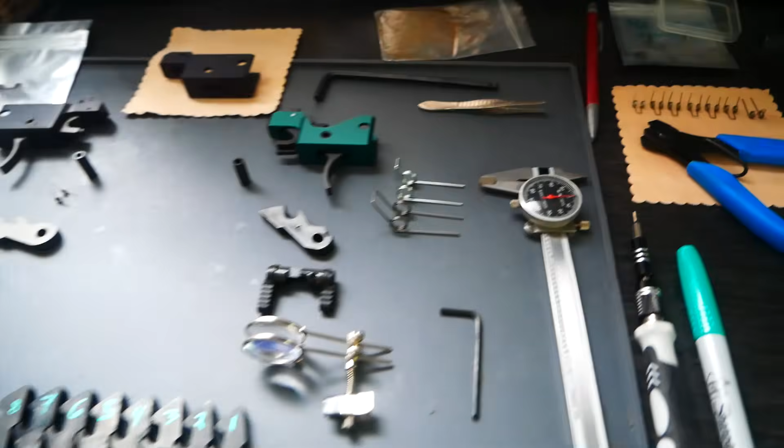I'm going to bring you over to my desk and show you some of the things that I've been working on. Okay, so welcome to my desk. Basically what I'm going to do here is just show off some of the parts I've been working on.

The very first thing that we're going to be releasing would be this. How do I want to do this? As you can see, several different design iterations. These are all just small micro improvements to improve functionality, in some cases just working out design and making things work.

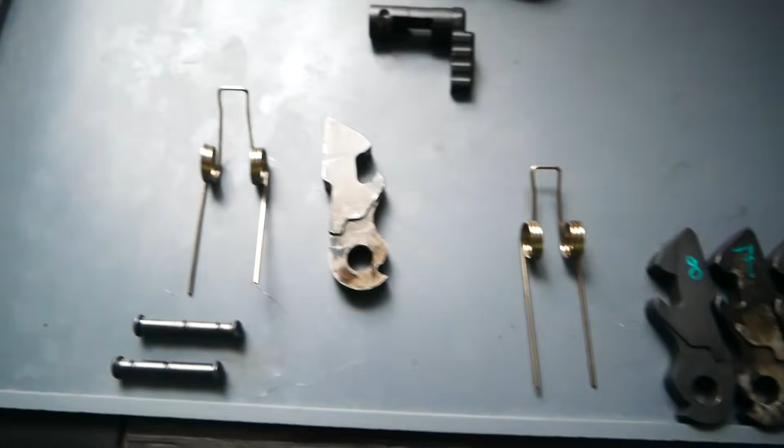The new hammer spring that will be coming along with this new hammer, which I will explain here in a minute, as just the hammers, the first item is going to be coming out. These are all just, they were heat treated and dropped in the oil.

They have not been tempered or had any kind of other post-processing. They basically came out of the oil after hot heat treat and then were dunked like that. So they will not look like this. We will be using a hot bluing that is mil rated for corrosion and everything. New upgraded process for these that'll be super exciting.

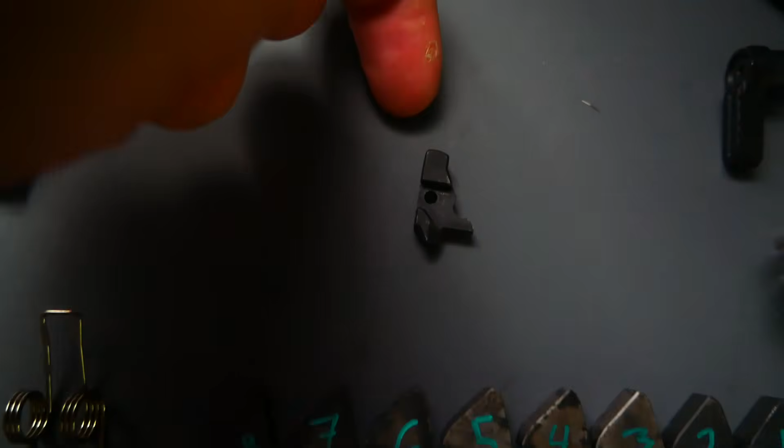Okay, and then soon after that I will also be releasing my version of the locking bar. The big improvement here is the same thing I had on my very first Gen 1 rare breed, and that is the easy close feature up on top.

Instead of the current ones that have this kind of hook shape up here that you have to step your BCG over, which, because if you're ever in a high stress scenario and you get a jam or something, your gun's all jammed up and you got to pop it open and pull a stuck case out and then put it back together, that extra step of having to pull your charging handle is no bueno in my opinion.

And so this, I think, should be a standard on everything and is a huge improvement, just having that easy close profile at the top that I figured out long ago when I first developed the torsion lock bar style locking bar.

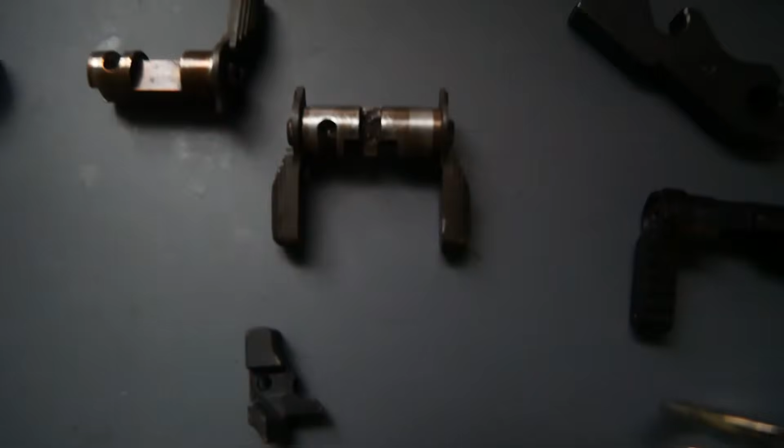I really liked the 2 position where it throws that FRT first, and I was like, I want to keep this in there, and so I developed what I was calling the Light Fighters Quick Action Safety Cam, which is this. It switches everything to be like a safe, FRT, then singles, quick action, right? I want that FRT up front where it makes sense, and then when I have time to take that long, slow, precision shot, I've got time to flick my safety over that 1 extra notch to the singles. So I've had a ton of positive feedback on the 200 triggers I released with this feature here.

Everybody loves this safety, and so I will be doing safeties. And part of what I'm doing here is some of the parts are just going to be actual upgrade improvements. And I'm actually going to talk more about this hammer here in a second because I've upgraded multiple things on this. It's not just a hammer spring, which I will talk about too, but I will show that and talk about it here in a minute.

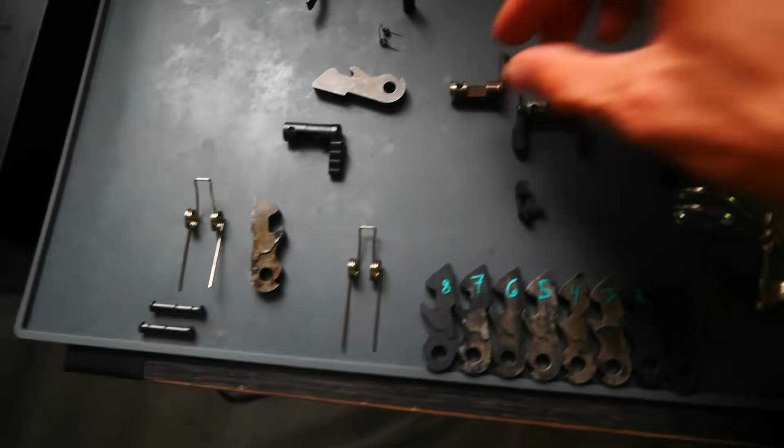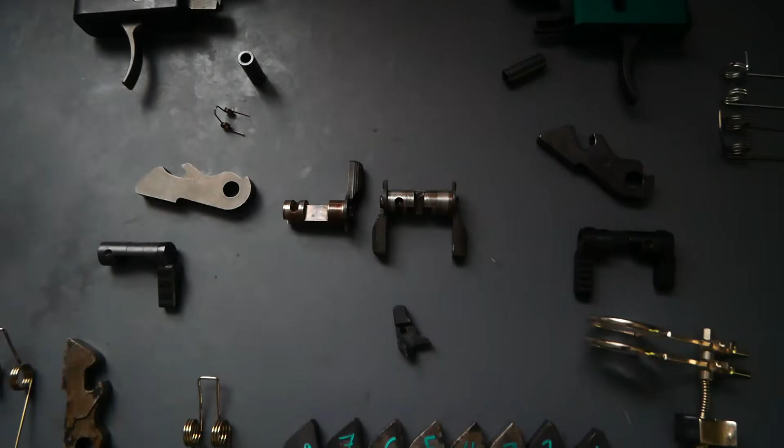But yeah, like with the safety, we're also gonna be doing design customability for your FRT. So when it comes to the safeties, we're gonna do everything safety wise. You're gonna have the classic one in safe in 0, 90, 180. I'm also gonna do the classic in 0, 45, 90. And then I'm also going to do the new Light Fighters developed by Militia State Armory in safe in a 0, 90, 180 and in a 0, 45, 90 version.

So you'll have options there. And we're gonna go even further and give you 2 different options as well. You can have it in a steel cam or I'm also going to do it in an aluminum cam, so you can have lightweight or durability depending on your mission set and what you need. And so both those will be available. And then going into some of the customization things, everyone's going to be doing a classic. I know you all love the classic.

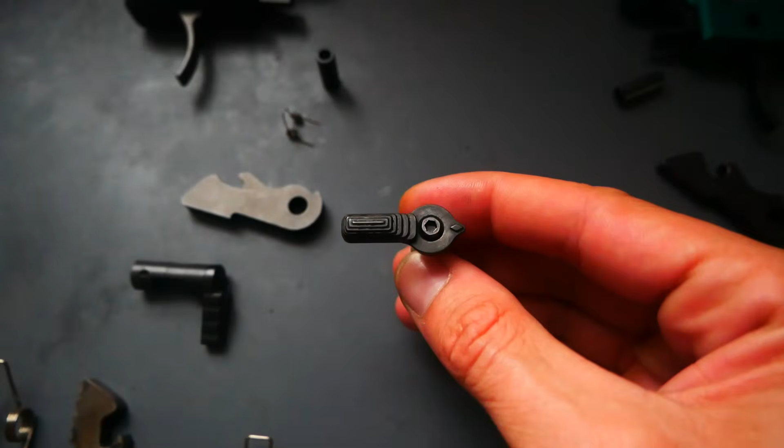I'm probably going to do a classic too, just on principle. I will have my Light Fighters Advanced Classic, inspired from a classic trigger. It looks like a classic. The only difference is I've cut this front at a 45, because on other safety levers, when you throw to that 90 position, you get jammed up on this corner. This one is cut so your finger doesn't run into a wall and get jammed, but floats up over that corner and digs in, giving you that last little push.

My hands look really red right here on camera. They're actually usually really white. Okay, side note, but yeah.

This is why I call it the Advanced Classic, because it is the classic design, just made better. I'm probably thinking I'll do this in reverse, so instead of having a convex, it'll have a concave inner swooping, giving you more of a flat blade, and then do a different, stylized design. Nothing like this - I think these are overdone, where you just have kind of a basic lever, not a whole lot to it, pretty basic. We'll do some styling, try to make them look a little more quality and firearms-fitting, not like a toy, but like a gun designer created it.

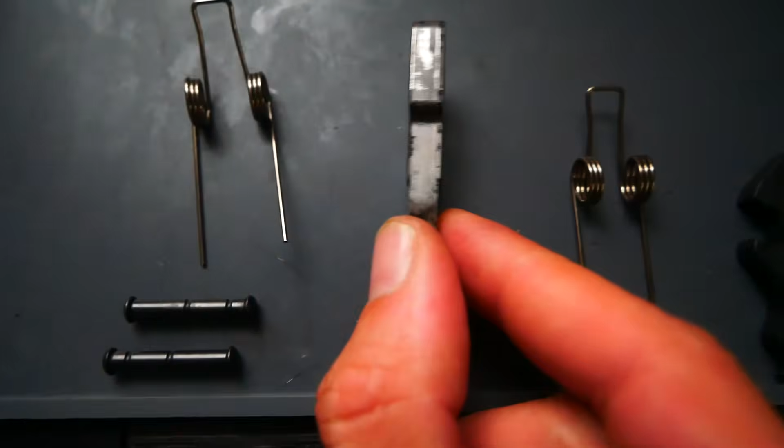This is why we have these cutouts on the side here. It's a little bit thinner, just at this bottom profile - I'm not going to give you numbers, but it's not very much. It's just enough, so calculated, that we can use a heavier wire spring and put more coils in there. It's got one extra coil from the standard - this has 4 coils, that one's actually got 3. You can count from the other side and see the 4, one to one, it's exactly 4 coils. And if you look at the preload on it, look at that preload.

Because we have an extra coil in there, you get multiple things. When it moves through its arc, when the hammer's cocked back, the more coils you have, the less each coil has to move, right? And so you're going to get longer life. But then you have the thicker wire and more preload, so you're going to get a stronger, heavier, more consistent, reliable strike with your hammer on your primers. And yeah, something - I got one more point there, I can't think of it at the moment. But yeah, you're getting more stuff.

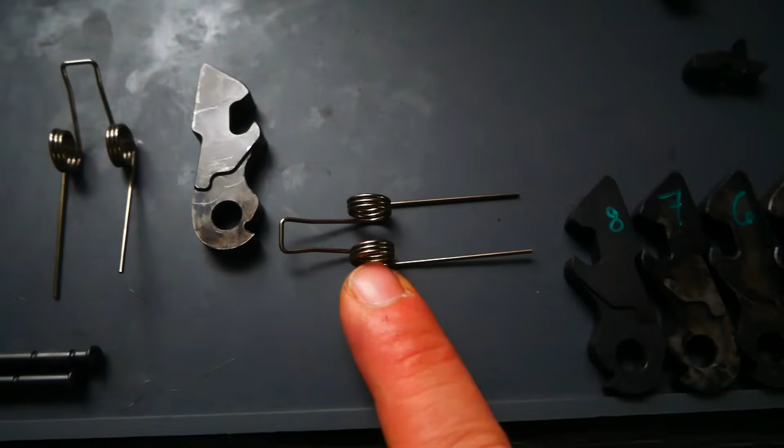Which then I'm actually going to be producing this, because we're doing all the customization parts. We're going to do 2 versions of this. So this is an 038 wire.

This is an 036. The 038 wire with one extra coil fills to max. Mil-spec hammer spring is an 045 wire. I have an 047 wire coming in, and it'll have the same number of coils as this. I'm going to give it that preload, but what it's going to do is give you a hammer spring that's very stiff and will set off your primers no matter what.

When you just absolutely need a hammer that can drive it home, then that one will be the one available. This one will probably be the more popular option, as it gives more preload, more power, more life expectancy, more of everything over the lesser coil design, but is still better, still has higher things, whatever.

Alright, so boom boom, I'll put out a video on that. We can talk more about the hammer spring. I've probably covered a lot of stuff. There's a lot of things I haven't covered, but at this point I'm just going to be echoing myself because I don't remember which parts I've covered and not covered.

Okay, so that gets us into other features of the hammer. That talks about the cutout here. Another big gripe I've had with hammers is everyone has this really pointy square tip right here. And when you look at the face, this drags - that little nose, there's a tiny spot right there that drags along your BCG while you're shooting.

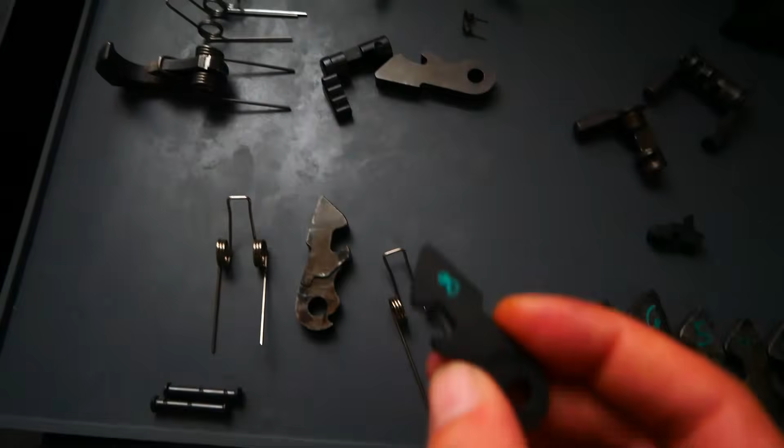Dragging is not good, right? You don't want parts dragging on each other. So this one has been redesigned. Let's see if I can get it on camera here. That nose has been tipped back. I've had to do several designs to get this feature right. Oh, you'll have to go look at it in the ads. I'm sorry, guys. Actually, I'll show it to you on Fusion here in a second.

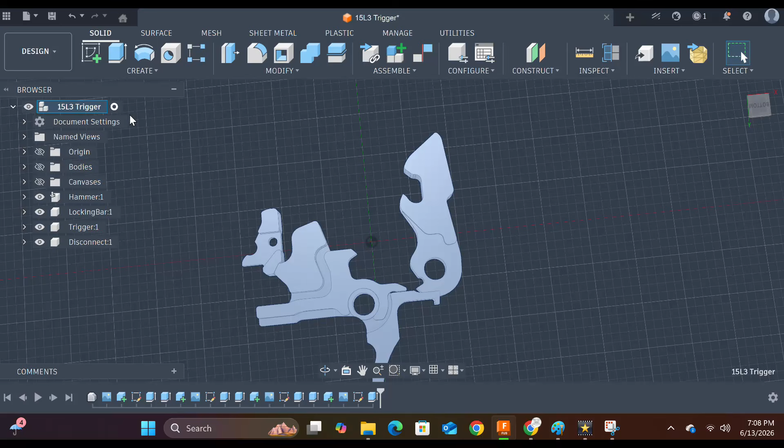This nose has been tipped back so that instead of riding on a small point, when the hammer's first cocking, the BCG hits about here, walks across the face, and then right at the very peak, when you're at full BCG, this last little bit is where it just drags, and you have a small flat about this long because the bottom of your BCG angles down and then flattens out. On that flattened out spot is where this spot just drags.

Well, here with that little round, as soon as it cocks back and reaches that position, this actually walks - it rolls, kind of walks along the bottom side of the BCG in that spot. And so you cannot pull the trigger too hard where it's going to preload, because as you pull the trigger hard, it walks. That top little bit walks and gives the BCG forward momentum, and it slams home.

So this is a huge, huge improvement. I've talked to tons of people about this. This has been my biggest gripe with a lot of FRTs, because uppers and lowers aren't the same, right? Some of them are a little tighter tolerances. And when you get ones like that, this can drag and put a lot of preload and actually make your bolt go boom boom boom boom, shook shook shook. As you start pulling into it, you can slow that bolt down.

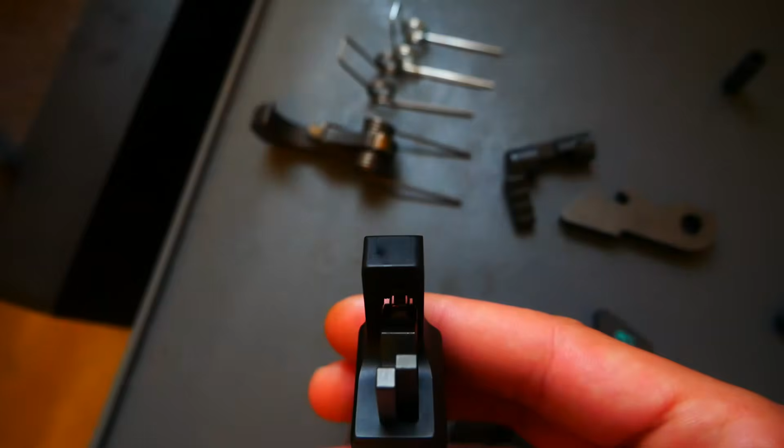Come on, focus. But mine just, it looks like it fits it. It's squared up, it matches. It's just better done, it's got a little bit heavier wire to it.

I don't know if I can get this right on camera, get this the right way. But it's just better done. The edges are more trimmed in where they're supposed to be. It fits the profiling better. It doesn't squish out into the edges, and it's just balanced better for the locking bar.

It's small improvements, but when you're talking long-term reliability, it's the micro things like that that really do end up making the difference. So there will be huge improvements done to this, and I will be making the locking bar for the Partisan as well.

If you've seen the Partisan locking bar, it's kind of like my original Rare Breed, although they went a little less spring, a little more material. Once you actually pull it out, there's a lot of just bulk material on the locking bar, and it's kind of an underwhelming spring as well.

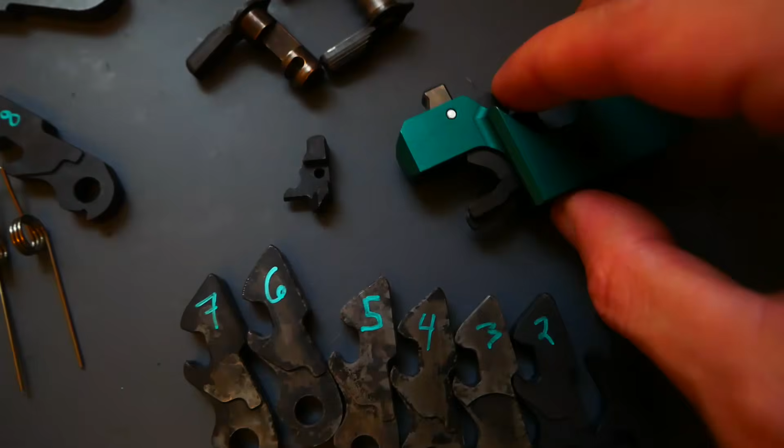So I'm going to be bringing this style, the dual torsion, to the Partisan. And with this, there's actually probably going to be 2 options, because there's not really any good options here for this, so it's going to be user preference.

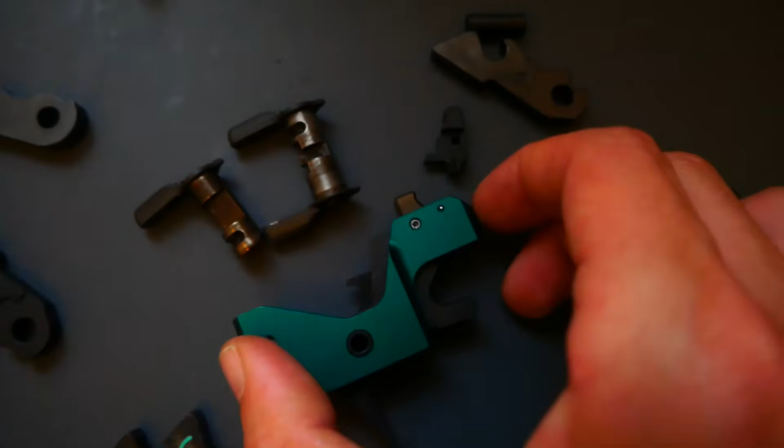Option 1, the slightly more expensive option, is I will have a drill and a pin that comes with the kit, so that you can chase this hole to the other side, put a pin in there, and use the full classic one.

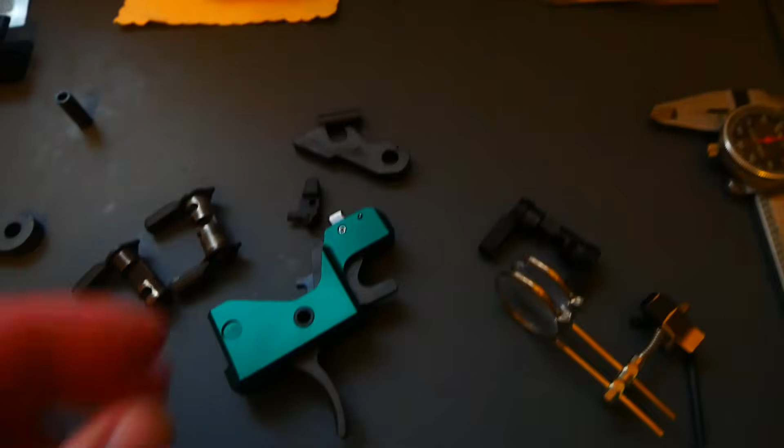The other version will be where the spring just— sorry, battery died. Oh, battery died, and now I can't remember what I was just saying. I had to go run off and get a new battery for the camera and everything. But yeah, we'll be upgrading the locking bar.

Oh yeah, and then the second one is going to have a spring that comes up and just rests on top. It's not the best option, but that's why it'll be the lesser expensive of the two, and the more expensive will come with a pin and drill so that you can chase it.

I'm nervous about it because I don't know everyone's ability to chase that, and I feel like that's the one I want to do, but in case some people don't have the tools and ability but want an upgraded spring, it's kind of the option I have at the moment as far as I've thought and put into it, because I've been working on a lot of the other stuff as well.

Final thoughts: the hammers are coming out first, and then I'll probably be doing some of the safety levers. A big issue with the safety cams at the moment is actually material. I need 3/8 material, but I need 3/8 undersize, and for whatever reason I cannot find a good material supplier that can get me 3/8 undersize.

I got someone local that I'm supposed to be calling this next week as soon as it turns Monday, and I'm gonna be asking them on that because I need something like .372, .373, but it always comes in at 375.5 or all the way up to 377— sorry, that extra 7 threw me off for a second. But yeah, it goes all the way from like 375.5 to 377. And like I said, I need it undersized, and it just seems to be a weird one that I don't know where everyone gets their stuff from.

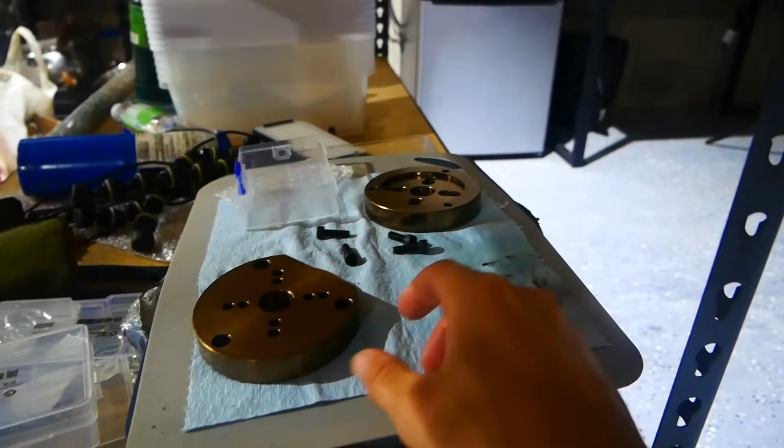But let me show you this. So for my 4th axis, I've been working out some gang plate tooling so that on my 4th axis— let me get this turned around so you can see things.

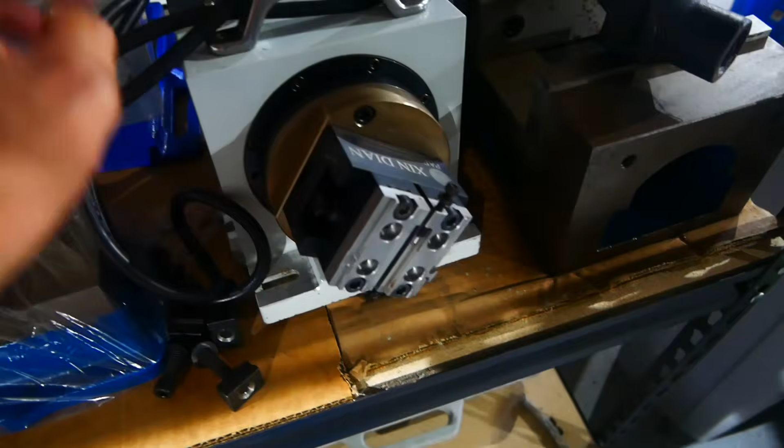Okay, and so on the 4th axis, not in the machine at the moment because I take it out between runs, because the last one I had, it got water down through this backside and ended up rusting the inside of the motor or whatever, and so I had to replace some things.

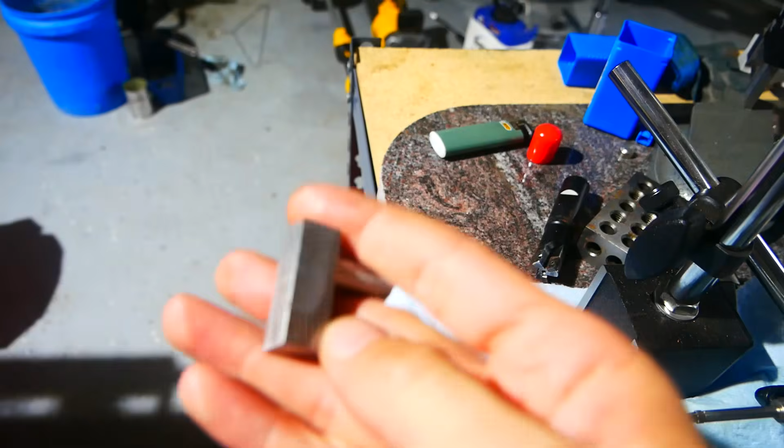But yeah, so you can see that block I was just making is here, so I can mount jaws like this, and then I need to remake those jaws, that's where my hold up is, because last time this is like a solid safety, single side solid safety. This is a tool just so I can load it in and use it in the future for checking indication and making sure everything is running zeroed and smooth on the 4th axis to cut the camming.

And then I can take this over to other jaws and put the whatchamacallit on there, like just the lever design. And so this one is short, it's not safety cam length because it's designed to be short, because this is going to be a tool, but in general that is still the right material, just cut shorter. Like this is going to be a longer safety barrel, the cam. But it's basically kind of how your op one stock is going to come out looking for the mill.

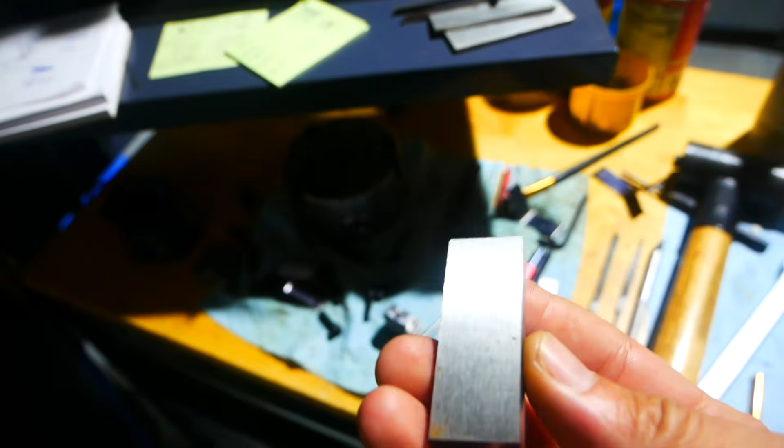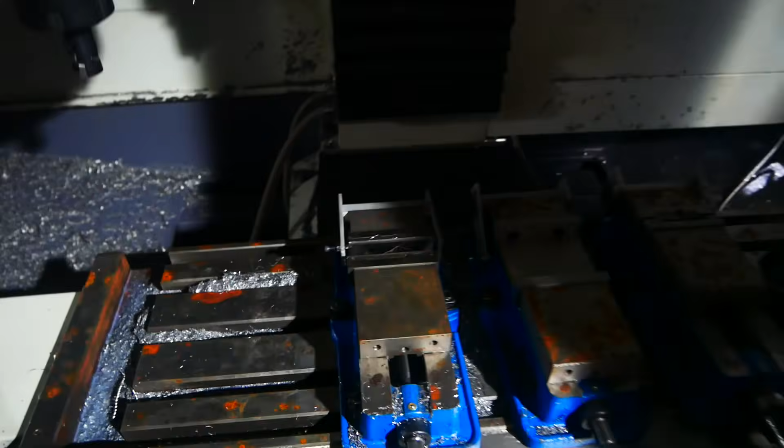And then I guess here in a minute, next video coming up probably later today, I'm going to go ahead and manufacture an extra hammer for you guys and pull out some of the hammer stock and machine an extra hammer and show you how that looks, because at the moment everything's just kind of shut down, I've been prototyping, so I've just been running one at a time, and some custom jaws over there. Hard to see because I don't have lights.

This is a rough video, and you guys are just along for the ride, because I got to get some advertising out and show some of my things, what I'm working on and doing, before I just completely get overshadowed and taken out by loud advertising.

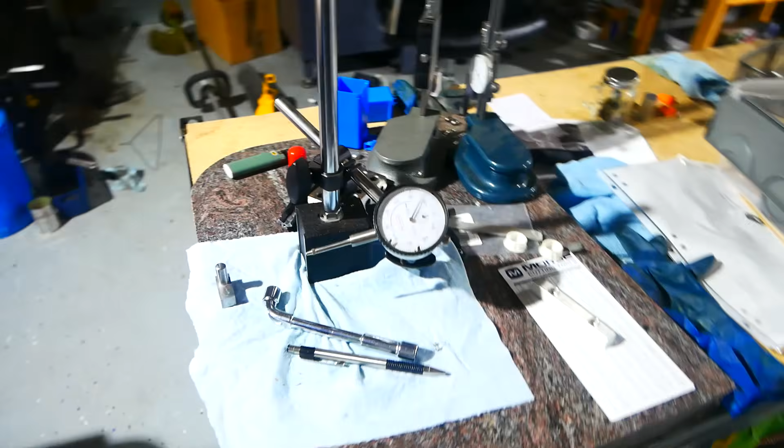Okay, so that basically sums it up, shows you kind of what we're looking at as far as time frame goes on things. The hammers I've been doing a lot of testing on. That's where a lot of my work has been, and so those are basically ready, coming out probably in about a week. I've got all the design work done, but I don't have any parts manufactured. I pulled this from stock that I had to face down the edges just to bring it to the stock material size I need.

And then a lot of that size has been ordered out on bars. It was supposed to come last Friday, and I was going to be working on it all this weekend, but instead it didn't show up.

So I'm here pushing advertising, I guess, right? Just letting people know what I'm working on, letting you guys get excited and showing you around, giving you a little bit of insight, because I'm really bad at my advertising, and you all know that. Been here from the beginning, and I don't really have a huge following. Personal gripes. I should probably cut this part out.

But yeah, so that's a good show around of what I've been working on. I'll show you some other things later, like my Miata over there, turboed custom. I've had it for a long time, and the last several years it's just been sitting there collecting dust, so I cry inside when I see it anymore. I'll give you a peek of it because we're talking about it.

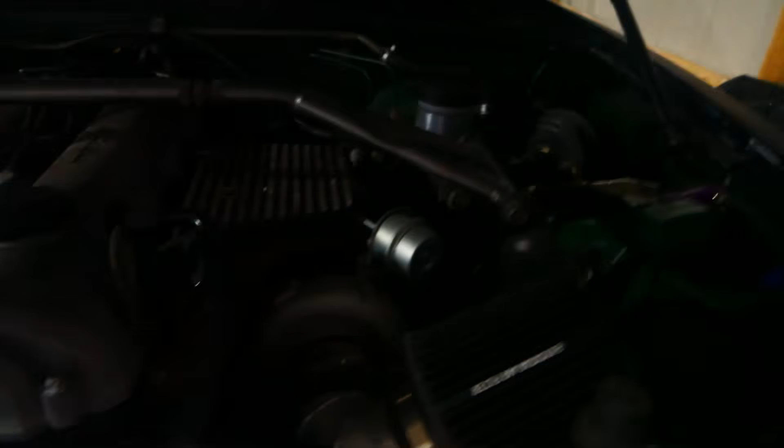GT 2871 turbo. I did the impossible, 2.5 inch piping all the way down and around. I made all this here. It's all hard clamped, no soft clamping that'll blow out. When I pull this apart, there's a flange in here. There's 2 flanges that come together with 4 different O-rings, and this clamps down over all of it and mushes it together so it can't go nowhere.

And yeah, nice, fully custom 2.5 inch exhaust off the backside, 3 inch tip. I'll give you guys a look at that. And this is way off topic. There it is, boom, fancy tip.

Okay, so that's it. I just want to show you guys what I'm working on and what I've been up to. I got more videos that are going to be coming out. This is just a quick peek at the things I've been working on.